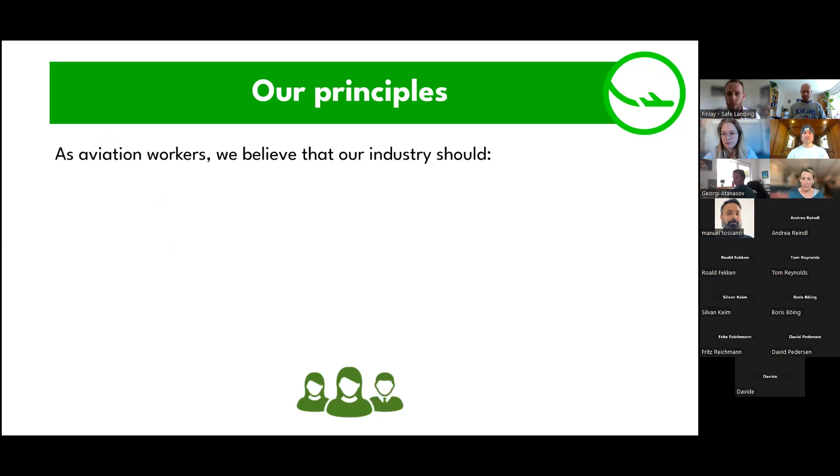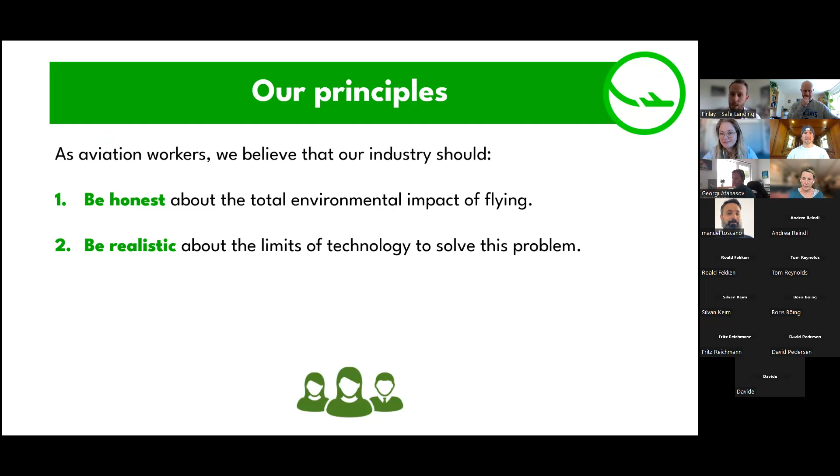We've got a couple of positions, principles as a group. We want our industry to be honest about the total environmental impact of flying. We want it to be realistic about the limits of technology to solve the problem. We want it to be transparent about future regulations required to reduce emissions. And we want to have a plan that accounts for all of that and supports workers as we transition and transform the industry towards a low environmental impact future.

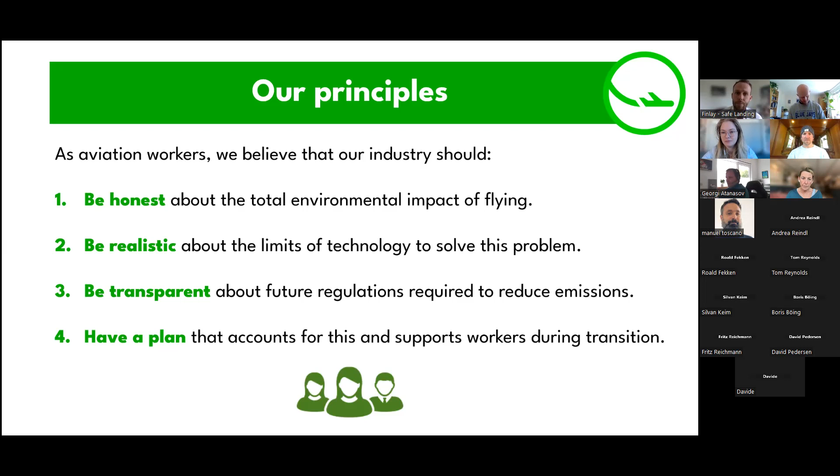Now, really excited about the presentation today. We've got Georgi Atanasov here. He's from the German Aerospace Centre, or DLR, based in Hamburg in Germany.

Now, this is a topic, flying slower, that I've been quite passionate about for a long time. We understand we've got a carbon budget, and also in terms of how much fossil fuel we can keep on burning. And we've also got limited resources when it comes to non-fossil fuel. So it's really important we fly as efficiently as possible so we can maximize how much we can fly within that budget.

And also flying slower is a potential way of doing that, as he'll take you through. But also the interesting thing from a Safe Landing perspective is maybe this will also allow us to increase jobs, even potentially within the constraints of flying less overall. We might be able to have a rebound in employment because we're decelerating how we travel. So really interested to hear some more of the technical input behind that. So Georgi, thanks for being here, and I'll hand over to you to take people through it.

Okay, thanks Finlay. So hello everyone. As Finlay mentioned, my name is Georgi Atanasov. I'm working for the German Aerospace Centre, in short DLR, at the Institute for System Architectures in Aeronautics. I'm a senior in the overall aircraft design team.

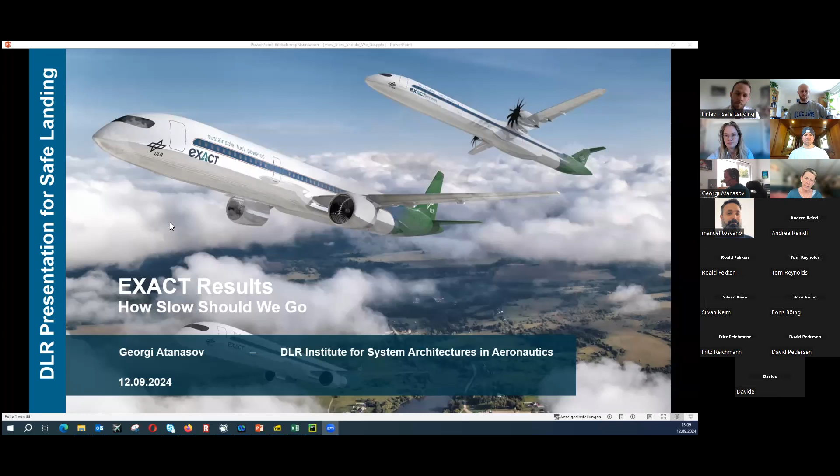So today the topic is how slow should we go, and on this topic there isn't very much literature or knowledge gathered, and this was something that we needed to improve in the past years. There was this huge project, a DLR internal project, Exact. So not everybody knows it, but there we did gain a lot of understanding on the topic, and the knowledge we got is quite interesting. So I'll try to share it with you.

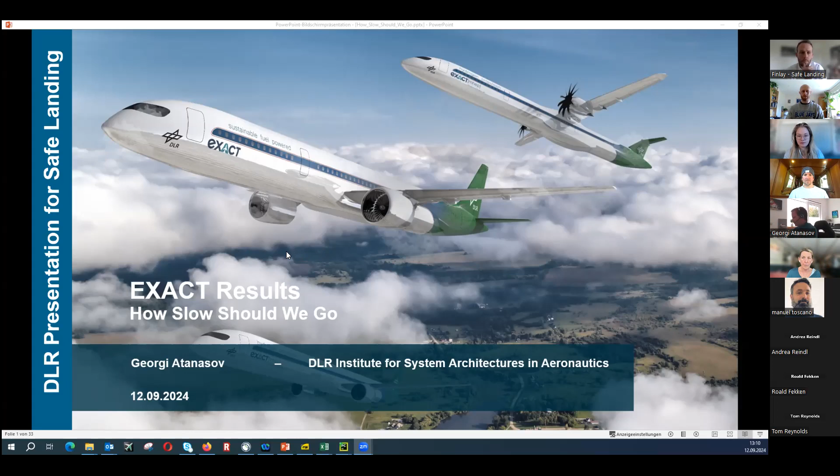So for this presentation today, first I start with the basics: why is flight speed important, then how is it important. Then I'll be introducing the DLR project Exact, followed by the description of a turboprop design within this Exact project, and a global fleet assessment study, followed by a summary.

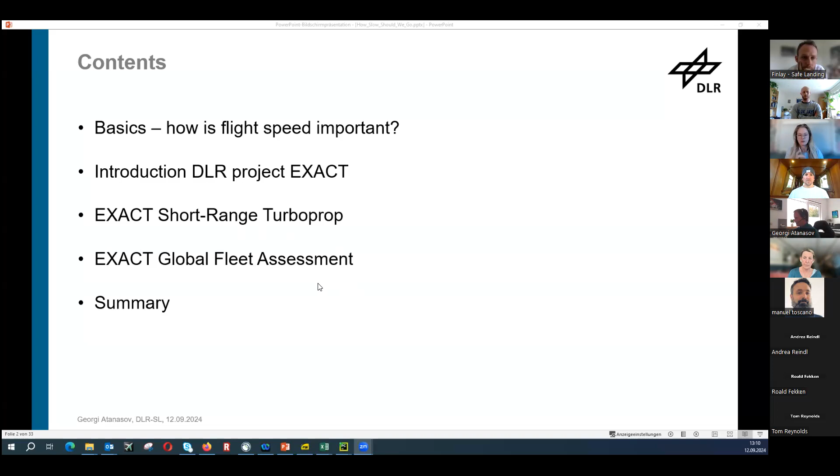So about the basics. If we look into simple forward flight, level flight of an aircraft, then we have lift equals weight, and we have thrust equals drag. It's a really simple case, and the aircraft needs to move from A to B. So the first question is, what is the energy needed to transfer from A to B?

The energy is power times time, so proportional to thrust times velocity times time, but it can also be rewritten as thrust times distance. So these are the same two equations: work equals force times distance.

So the conclusion is, because the drag can basically be described as the mass, or the weight, of the aircraft divided by the L over D, where L over D is the aerodynamic efficiency of the aircraft.

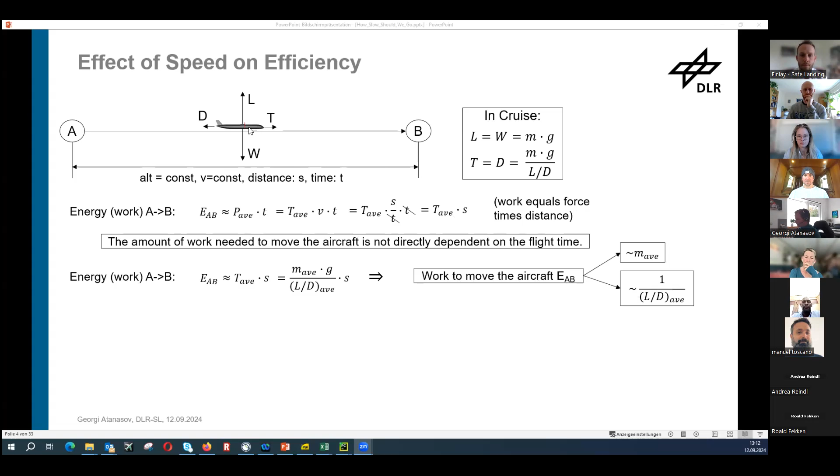Basically, the energy to move an aircraft from A to B is the distance multiplied by the mass of the aircraft divided by the aerodynamic efficiency, proportional to this energy. So if the distance is fixed, the only two parameters left are the mass of the aircraft and the aerodynamic efficiency. If two aircraft have the same mass and the same aerodynamic efficiency, you need the same energy to move both from A to B.

What comes additionally is the propulsion chain. This energy comes from the propeller or the fan of the aircraft, and basically the shaft energy is then the propulsion energy divided by the propulsor efficiency.

We can go further down the chain after the gas turbine. The gas turbine is the usual provider of this power, so the fuel energy is the shaft energy divided by the gas turbine efficiency.

So the fuel energy is basically proportional to the mass of the aircraft, the aerodynamic efficiency, and the propulsion efficiency — the gas turbine efficiency and the propulsor efficiency. This is the first order effect for moving an aircraft from A to B. Flight speed is not directly in these parameters, but it can affect the design such that these parameters change a bit.

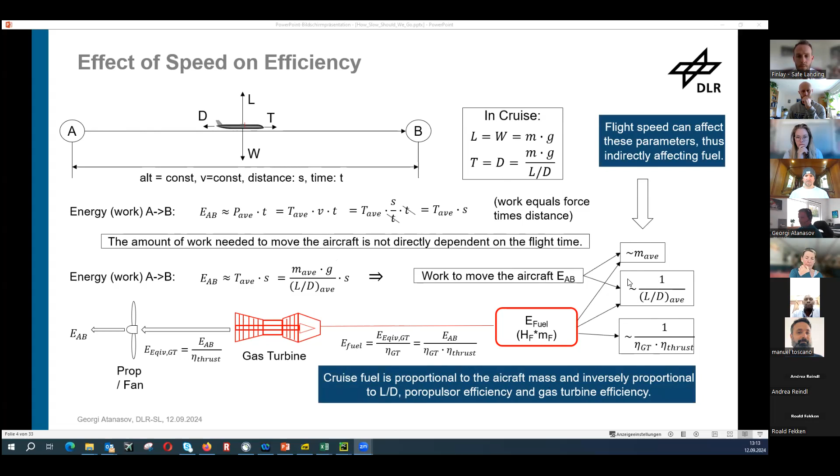So usually when we see an airliner, it has a look similar to this one: a transonic airliner with Mach speeds of over 0.76 typically. All of them at these transonic speeds have swept back wings and usually turbofan engines.

Turboprop propellers are not the typical design choice, or not a suitable one, because propellers do not operate really efficiently at speeds close to the sound barrier. Counter-rotating propellers or open fans can be significantly more efficient than turbofans, but they come at the cost of high engine noise levels, so they also usually don't make it to final products.

So what happens if we switch to subsonic speed? First of all, turboprop engines become a suitable design choice. Propellers designed for subsonic speeds can be really efficient, and they're also much larger than fans, so they can move much more air and require much less power for takeoff.

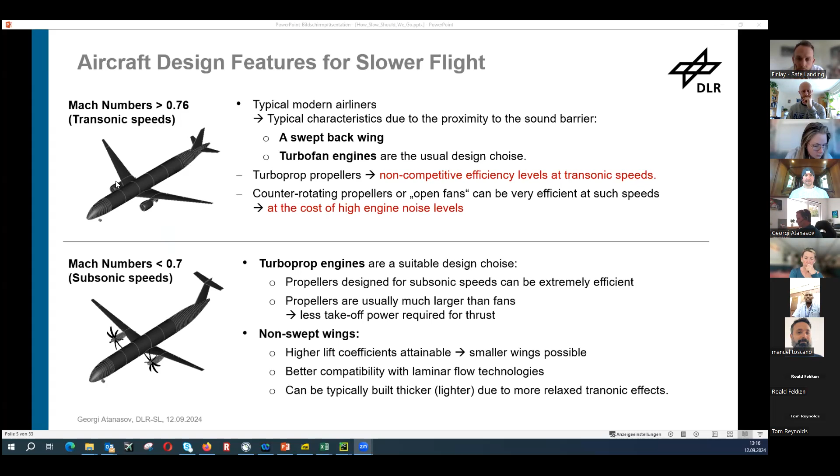They can also be built structurally thicker, so lighter than a typical swept-back wing for transonic operation. So overall, shifting from transonic cruise speeds to subsonic cruise speeds can enable more efficient propulsion, lighter structures, and improved aerodynamics. Overall improved flight efficiency usually enhances any additional sustainability solutions — efficiency is always the base for sustainability.

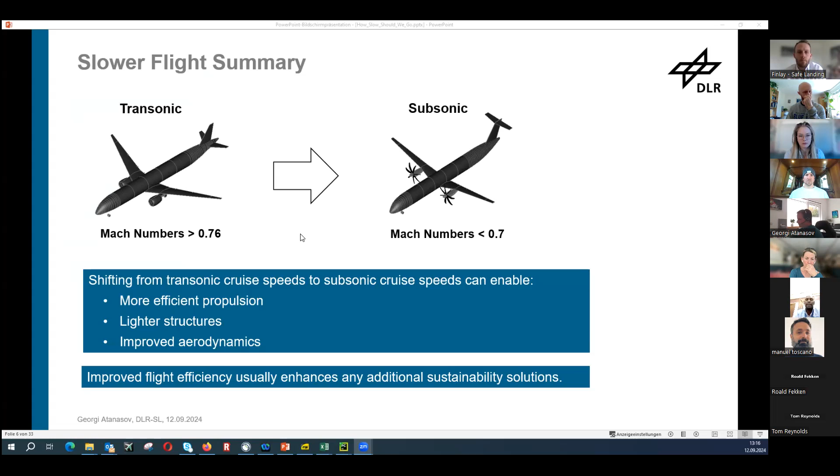So a couple of words about the DLR project EXACT that I mentioned: it started in 2020, four years ago, and finished last year.

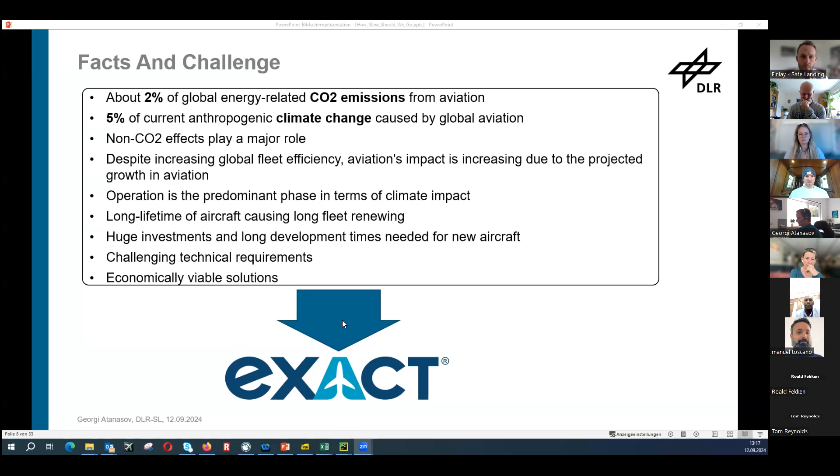Back then, there were a lot of open questions about sustainability and research topics starting to arise at an increasing rate. So there was a lot of need for improving the understanding of how aviation sustainability can be improved and what strategies should be taken politically. Because of this, we had to try to answer a lot of these questions, and this gave way for a large project which basically tries to answer those. Answering such questions cannot be done in a small project, or not satisfactorily at least.

So you need a lot of disciplines to assess. One has to try to capture the whole picture, from energy production to air traffic demand and air networks to aircraft design, which basically builds the bridge to the climate impact. So from energy production and propulsion technologies to air traffic to aircraft design and then to climate impact. Everything needed to be looped in this project, and it got a lot of funding volume, basically 20 million euros for these 4 years, with a consortium of 20 DLR institutes. So it bundled quite a significant portion of the DLR capabilities, and it was a really interesting project to be part of.

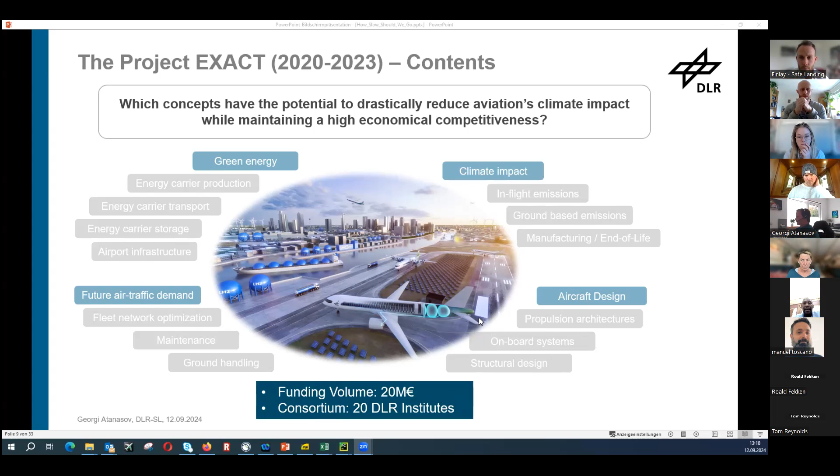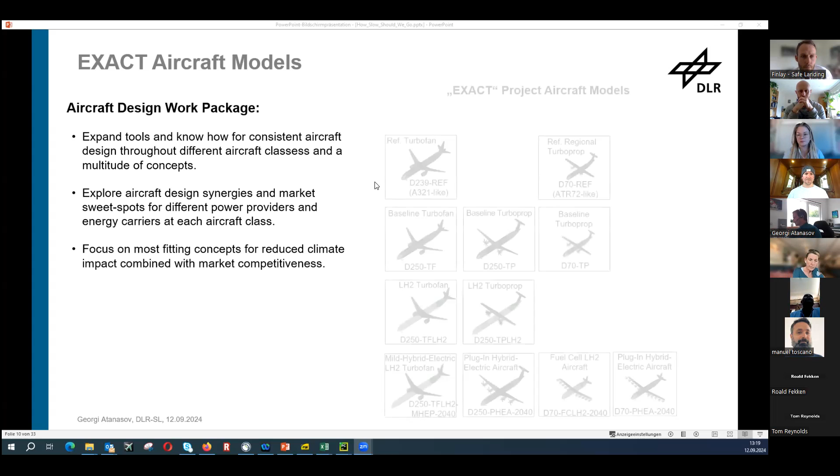On the aircraft model side, as mentioned, the aircraft models needed to build a bridge between the global assessment and the technological assessment. We had to expand a lot of knowledge and know-how and create new tools to enable consistent aircraft design for different aircraft propulsion technologies and energy carriers, and also for different aircraft classes. It was a difficult challenge because usually you have a project where you have one aircraft and it needs to be calculated and assessed versus a conventional aircraft. This is a typical project. In this case, we had to answer a lot of questions, so we needed a lot of different aircraft calculated, and they needed to be calculated in a consistent manner, comparable to each other. So basically, they had to be compared consistently with each other. And this was a significant challenge.

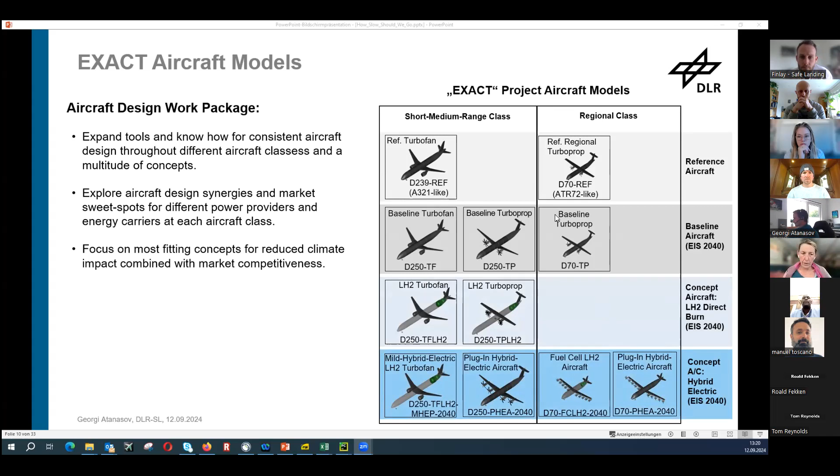But we also set some boundaries. The focus was only on the short, medium range class and the regional class. We had the reference aircraft there, so this is the starting point, like the typical airliners for these two classes. The baseline aircraft are assumed to be kerosene fueled, and the advancements are designed for the year entry to service of 2040. Only evolutionary advancements of propulsion and airframe are assumed for them. Then there are the direct burn concepts with hydrogen and hybrid electric propulsion concepts, clusters basically. But the focus of the presentation is on these conventional aircraft.

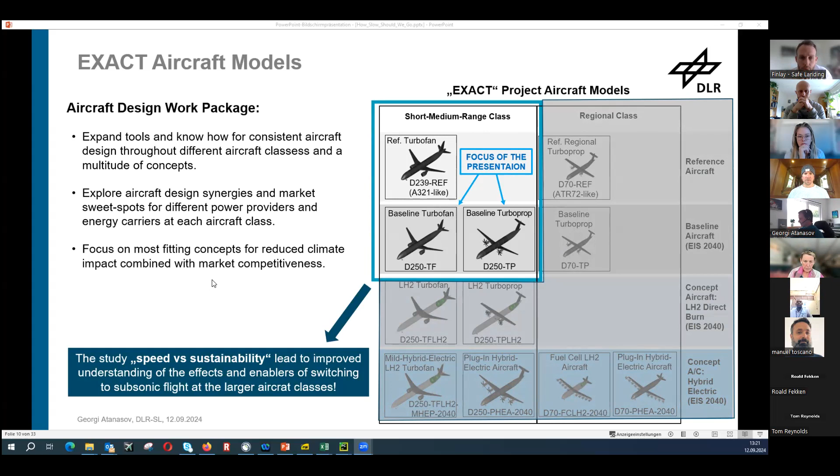So the study speed versus sustainability led to quite improved understanding of the effects and the enablers of switching to subsonic flight at the larger aircraft classes. And this is what I'm going to be focusing on in this presentation in the further slides.

So we have the boundary conditions for this study. The starting point is an A321 neo-like aircraft, so it's an interpretation by DLR of this aircraft. It's a model that we created to basically try to imitate the aircraft. And it has these typical TLARs, top-level aircraft requirements. So the typical design range of the aircraft with the maximum payload and takeoff field length requirement for the aircraft. These are used as a base for our designs with some changes.

So the TLARs are changed now to a bit shorter. The A321, usually calculated with a design range of, or the base version at least, with 2,500 nautical miles. The range is shifted to lower range capabilities because we're trying to assess the shorter spectrum of the market in EXACT, and the focus was on sustainability. So reduced range helps a bit with this, and this is the range assumed for all the aircraft in this class in EXACT. Then we have slightly reduced takeoff field length because of the shorter range, so a denser network needs to be serviced.

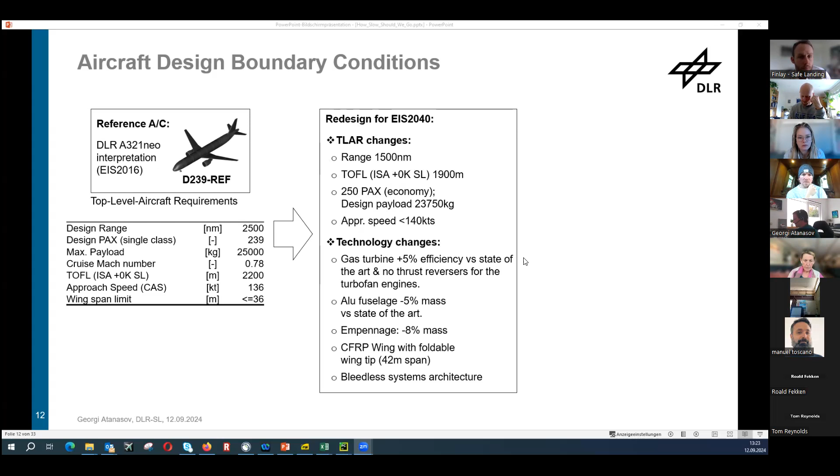Also a bit larger passenger capacity, also to improve sustainability. And there are some technology changes like improved gas turbines, better materials for the airframe, CFRP wing with foldable wingtips, and a bleedless systems architecture. Using these requirements derived for EXACT, two aircraft are created and compared to each other. We have a typical turbofan with these technology improvements, and then we have a turboprop, and this turbofan has basically the same characteristics as this A321 with these new requirements, of course. And a turboprop, but for the turboprop we have the Mach number open, so there is no comparable product to start from, so we needed to start from scratch, and cruise Mach number needed to be optimized.

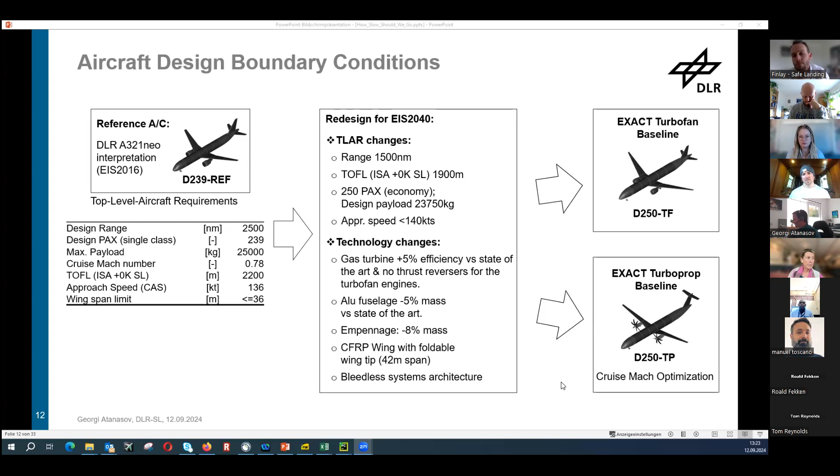So about the turbofan, this is the ladder chart showing the design mission fuel of this aircraft as compared to a state-of-the-art airliner. We have some improvement due to reduced mass, improved aerodynamic efficiency, also improved propulsion efficiency, or better gas turbines, and higher bypass ratio, which is a result of the better gas turbines.

There is this intermediate step with a winglet model, or improved future airliner with winglets. But then we also included the foldable wingtip solution, so basically even higher span to improve the aerodynamics even further. And overall, with just conventional technologies, they allow improving the fuel efficiency by about 20%.

Truss-braced wing and laminar flow technologies are not included in the study, so these were off. This is not in the spectrum of the study, but they could allow even better performance in the end. And this is the turbofan that the turboprop then will be compared to, so this 20% better turbofan than the conventional reference one.

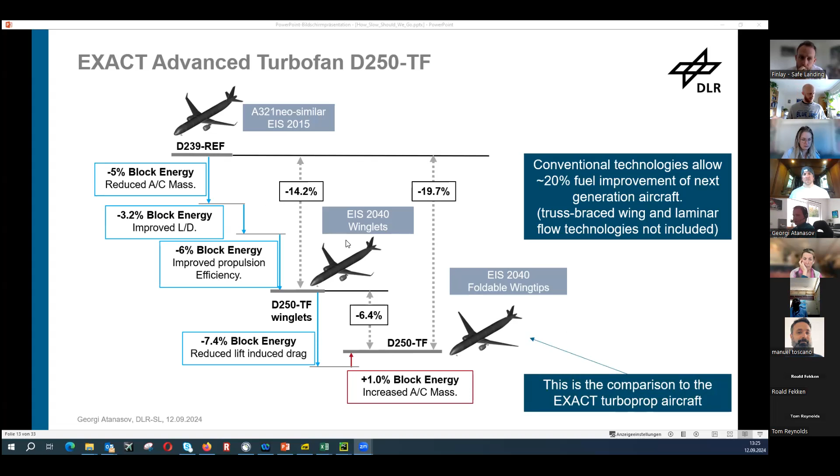So this is the turboprop design. We have the basic intention to trade speed versus efficiency. The design KPI is the global fleet operating cost of the aircraft, so it's not just on block fuel or the optimization, but on the global fleet operation costs.

Only unswept wing design was considered to avoid even further complications and complexity in the modeling. So this was one boundary condition that we set for the study. This required also Mach numbers below Mach 0.7, or Mach 0.7 and below.

The low wing configuration could be kept, so it's the same wing below the fuselage as in the A320, for example. It's possible with slightly gulled wing, despite the large propellers.

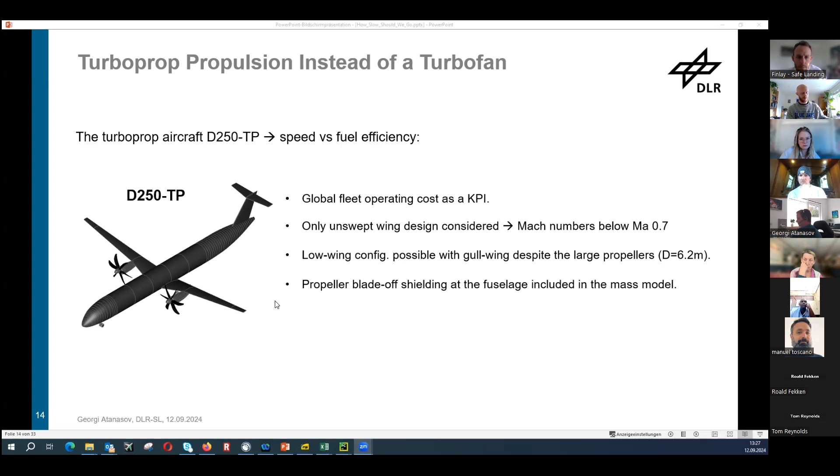Propeller blade off shielding is also included in the fuselage structural model, so the passengers are protected if basically a blade comes off during operation. T-tail was implemented to avoid the empennage being in the wake of the propellers in the slipstream.

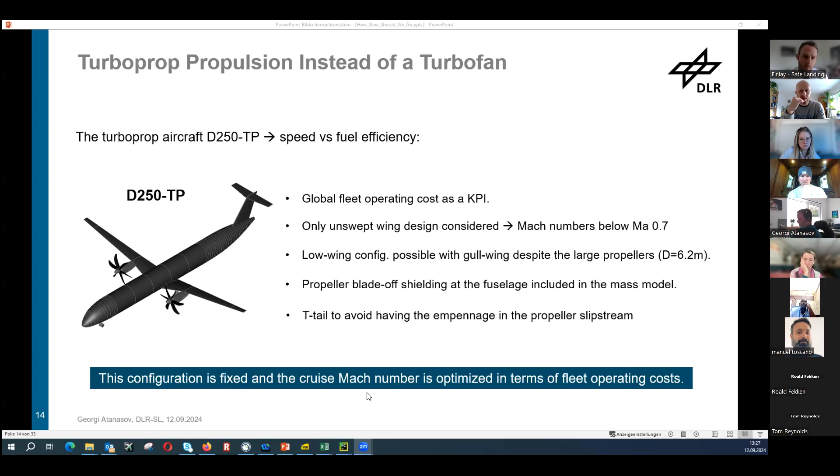And this configuration was fixed, and the cruise Mach number was optimized in terms of fleet operating costs, or at least traded, not really optimized, as I will show.

A couple of different configurational features. So we have slightly shorter fuselage because of the different empennage. The APU can be shifted a bit back below the vertical tail, so we get a little bit shorter fuselage.

Then, due to the gull, as mentioned, we can have a propeller which is aligned with the leading edge. So the middle axis of the propeller is aligned with the leading edge of the wing. And so when the center axis is shifted upwards, there is enough space below the wing, because if you have just a turbofan, you cannot align it with the wing, it has to be below the wing. So it's a comparable integration space-wise, or at least vertically.

And the landing gear could be designed a little bit smaller due to the gull. So without a gull, I would have a similar landing gear length, but then the landing gear would be inside the slipstream of the propeller, because it still needs to be retracted. So if it's too long, it needs to move outward, and if it's inside the slipstream, then it will be really noisy in takeoff. So these kind of aspects were considered in the design.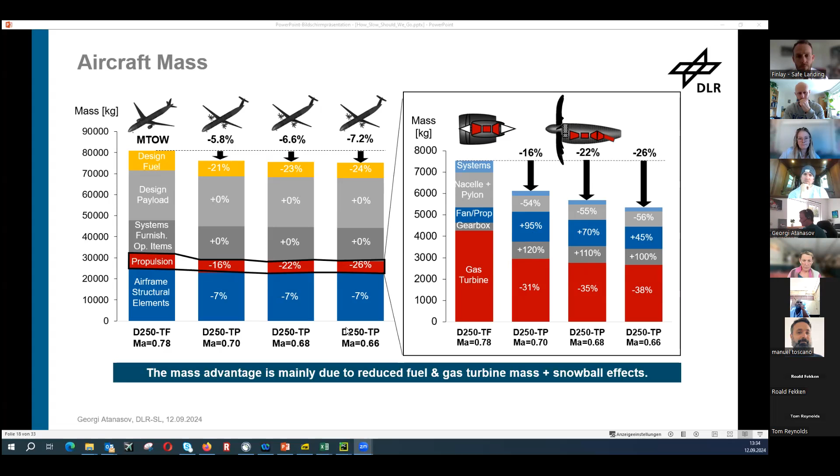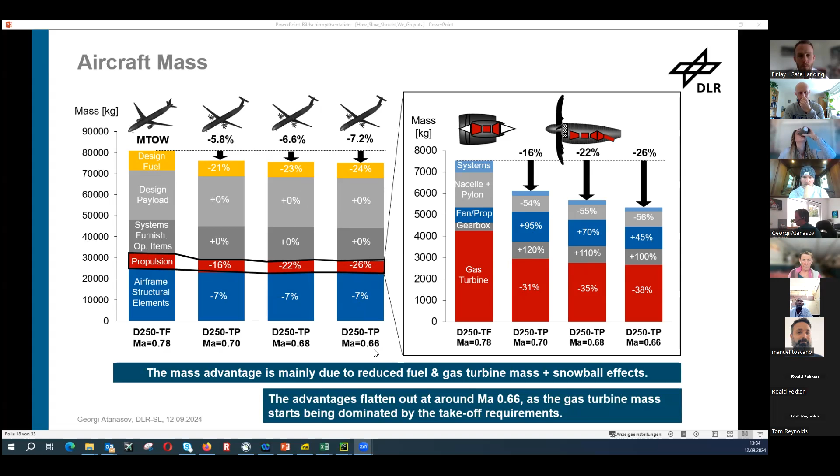And yeah, the gas turbines are smaller because the aircraft is getting slower, so flying slower means less power for cruise. The aircraft also requires much less power for takeoff, as I already mentioned, and I'll show in the next slide why. But these advantages are flattening out also. So below Mach 0.66, you don't get significantly more advantage in terms of mass.

First of all, on the turbofan versus turboprop efficiency increase, just an explanation example. The main difference between the two is the large propeller diameter, and why it can be built large is mainly because the turbofan requires a high fan pressure ratio.

High fan pressure ratio means the pressure jumps behind the fan. One thing it does to compensate is because the duct is there, and the duct creates pressure losses of around 1.5%, so the pressure drops till the end of the fan by 1.5%. So you need a high fan pressure ratio just to overcompensate this pressure drop, and then it doesn't need to be significant.

It needs to be insignificant compared to the fan pressure ratio, because if you have a fan pressure of 5%, for example, 1.05, and a drop of 1.5%, then you squander a lot of energy basically. So it needs to be negligible compared to the fan pressure ratio. That's why 1.35 is actually quite low, and it's enabled by a low pressure drop in the nacelle.

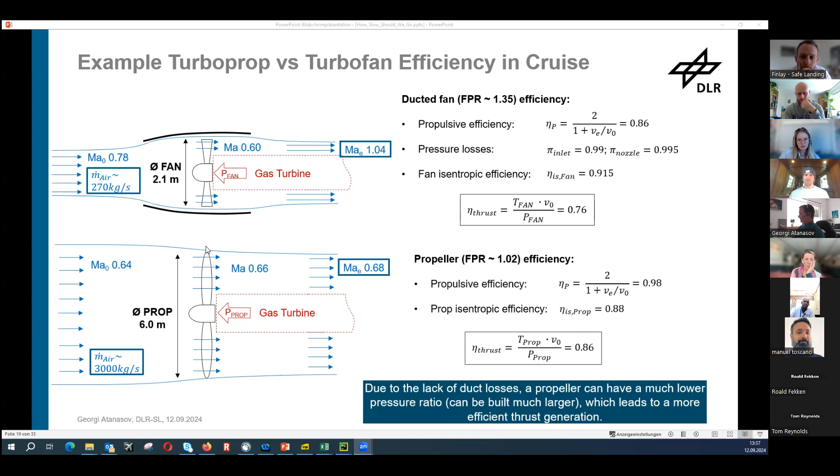So this leads to a propulsive efficiency drop. The propeller just has a 2% efficiency drop due to the slow acceleration, and the turbofan, because it accelerates the air quite a lot, has a propulsive efficiency drop of already 14% before the other losses. So overall efficiency of the turbofan is about 76%, and the turboprop in this case is about 86%. This is mainly because there is no duct, so this is the enabler.

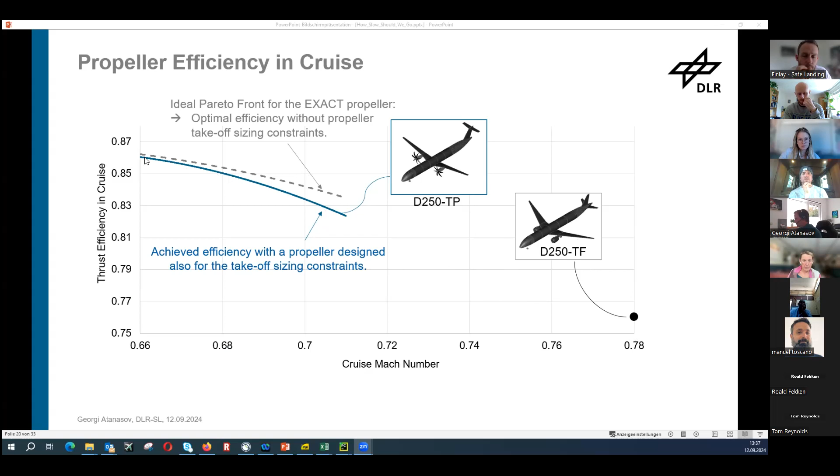There's a plot of propeller efficiency with variation of design Mach number. It drops significantly the larger the Mach number, and this is the efficiency in comparison to the efficiency of the turbofan. So at some point you don't want a turboprop anymore, but in this area it's quite good.

It's basically this helicopter effect. A large rotor needs to accelerate the air, not by a huge amount, just a little to get the thrust, and it requires much less power. So the more you need to accelerate the air, the more power you need. And it transfers even to end of field conditions, growing in proportion in this case.

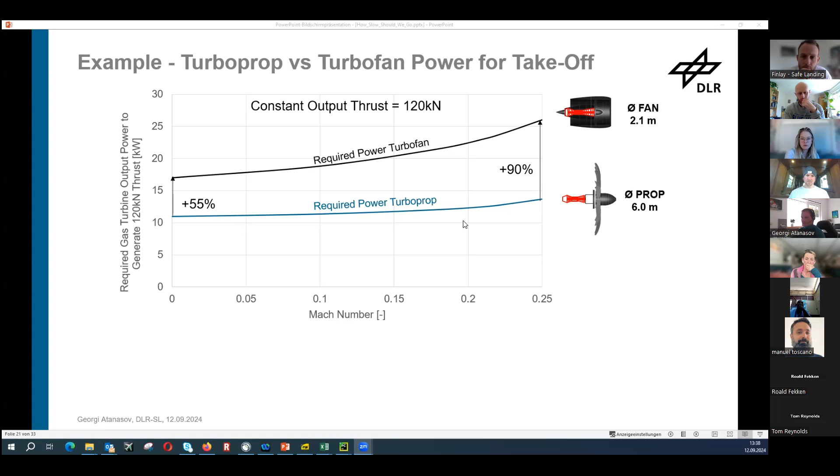So a turbofan needs to be much larger, basically, to generate the thrust needed for takeoff than a turboprop. The implication is basically a turboprop aircraft needs much smaller gas turbines.

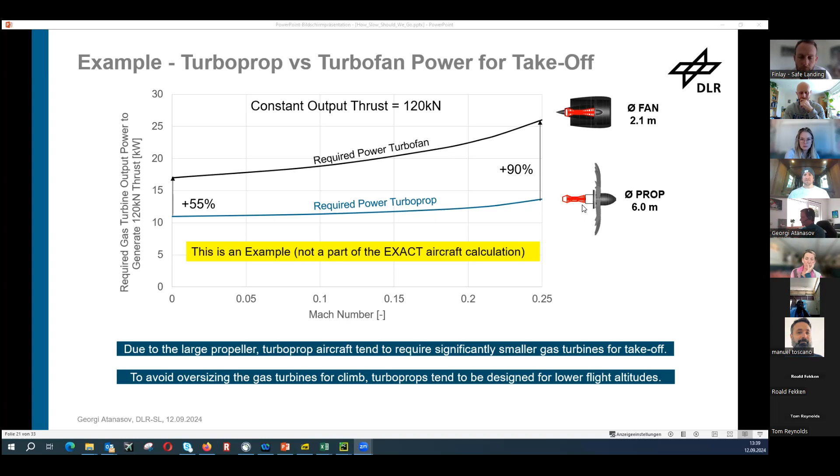To avoid oversizing the gas turbines for climb - if you set too challenging conditions for climb, for example set the aircraft to climb to really high altitudes, then this starts to be the driving point for your gas turbine design - to avoid this, typically turboprop aircraft get lower design altitudes. So it matches the takeoff power requirement, basically. This is why the better match for turboprops is lower altitude flight.

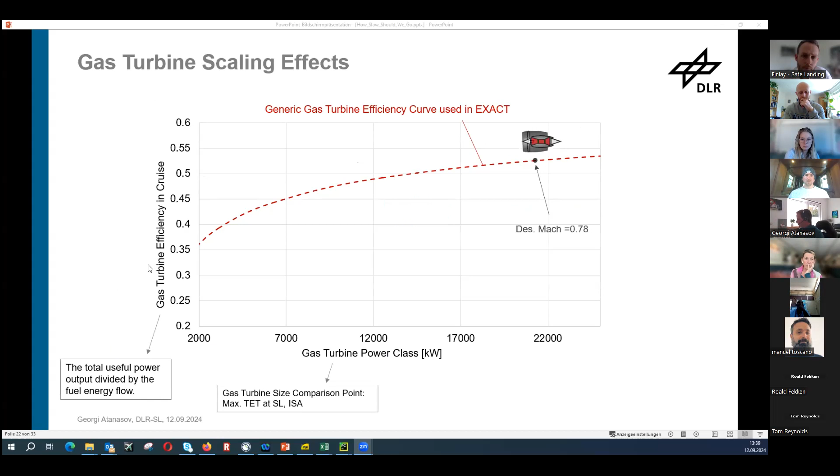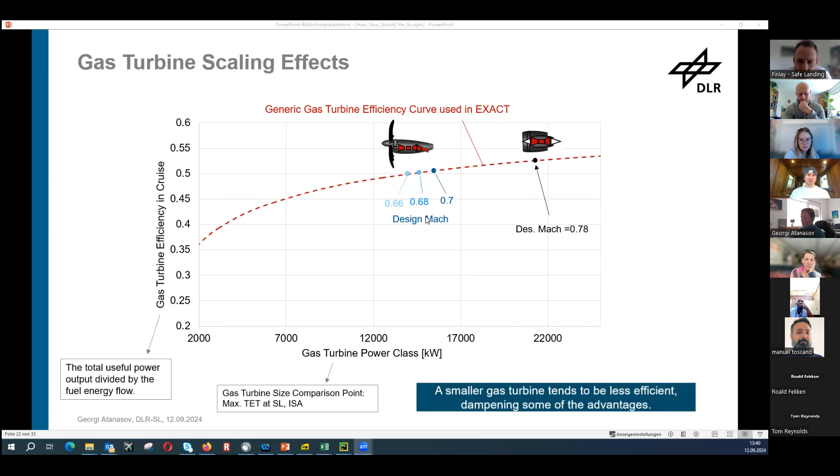So smaller gas turbines is not always good in all aspects. They are lighter and cheaper, but also less efficient. This is a generic gas turbine efficiency curve used in EXACT. We have the power class here, which is basically the power of the gas turbine at sea level conditions at maximum temperature, just for comparison of the classes, a comparable point, and the efficiency of the gas turbine in cruise. The turboprop gas turbines are much smaller, but also less efficient, so this dampens the advantages a bit.

So what happens is we have the following combination of effects that I explained before: mass, aerodynamics, then the efficiency penalty of the gas turbine, large gearbox - a two-stage gearbox needed for the large propellers, also a penalty - and then we have block fuel improvement due to propulsive efficiency of the propellers versus ducted fans, and improvement of the allowances and descent, so of design operation. Overall, for 1,500 nautical miles, the turboprop is like 20% better in terms of block fuel. This is a Mach 0.66 version.

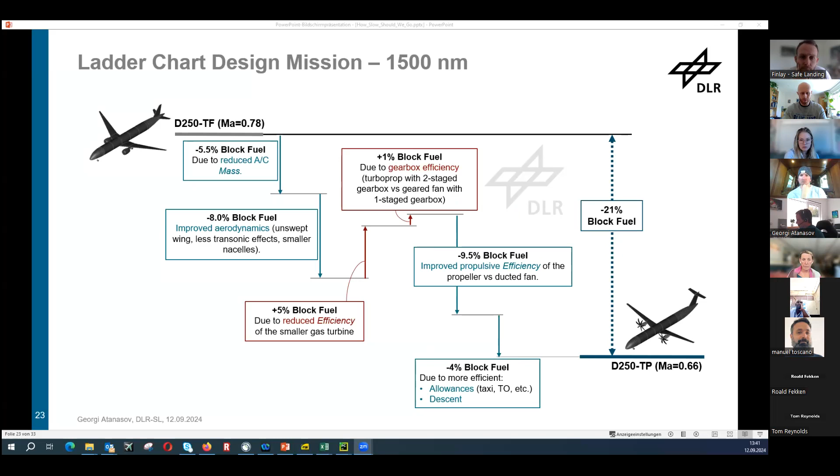One additional aspect, very important one as it turns out: the allowances or landing takeoff cycle. Basically you have takeoff fuel, taxi fuel, approach and landing fuel. They're much less with smaller gas turbines. So when you need a lot less power for takeoff, you also use a lot less fuel for takeoff, and the same goes for taxi and approach and landing. If your gas turbines are much smaller, they burn much less fuel during idle conditions. So overall, a lot of fuel can be saved in these phases.

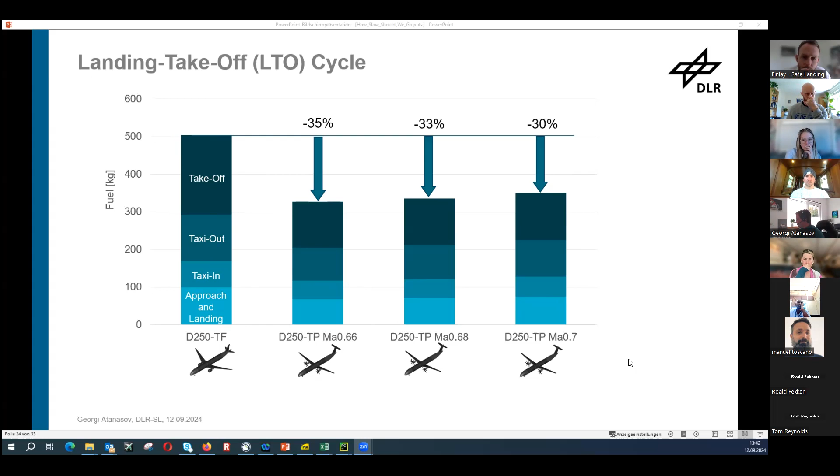You see the fuel for the turbofan is about 500 kilograms just at the airport, and it gets to about 350 kilograms for a turboprop, which is quite significant for lower range.

So if you look at the distances flown, this is the block fuel line for the turboprop and the block fuel line for the turbofan. You see 2 tons of fuel for a 300 nautical mile mission - basically Hamburg to Munich, no, a bit less, but about this range. A quarter is for landing takeoff cycle, so quite a lot is just burnt at the airport.

And because of this, the relative savings - these are the lines for relative savings - you see the relative saving at 1,500 nautical miles is about 20% for a turboprop with Mach 0.66, but it improves to about 30% at the shorter missions.

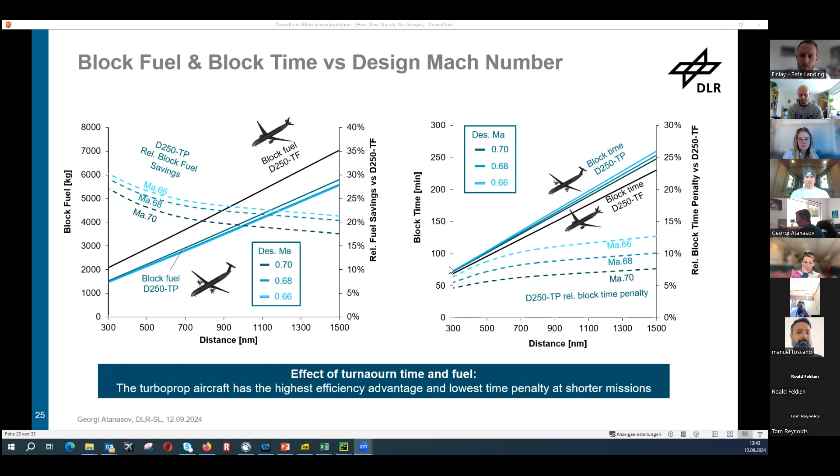So this is quite a significant aspect of turboprop operation, and a similar effect can be traced for block time. Mission time penalty for Mach 0.66 turboprop is about 12%, but just 5 to 10% for shorter missions, because a lot of the mission is around the airport and doesn't affect cruise speed. So the biggest advantage comes at lower distances for such a turboprop, operating intracontinentally it can be really beneficial without many penalties.

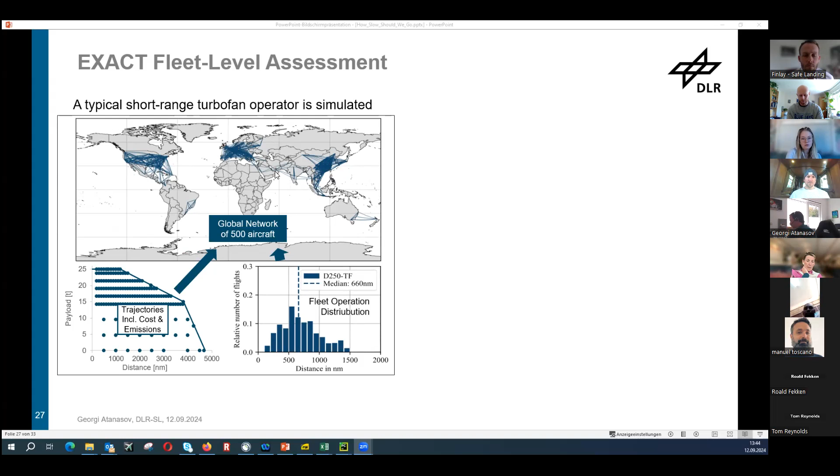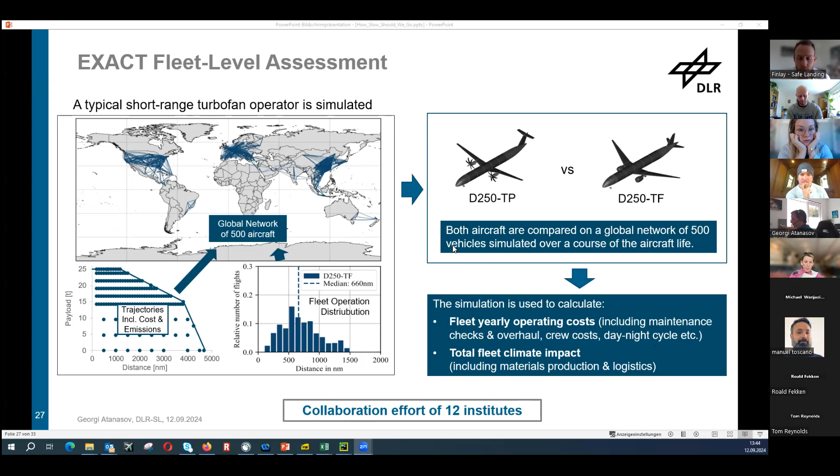So global fleet level assessment: in EXACT, it was calculated. Basically, it simulated a global operator with 500 machines on many different routes throughout the whole cycle of the aircraft. The simulation included its whole course of life, and it was used to calculate the fleet yearly operating costs and the total fleet climate impact. It included material production, logistics, maintenance checks, overhaul, crew costs, day-night cycle effects, and so on. It was a collaboration effort including the aircraft design disciplines of 12 institutes, so quite an extensive assessment.

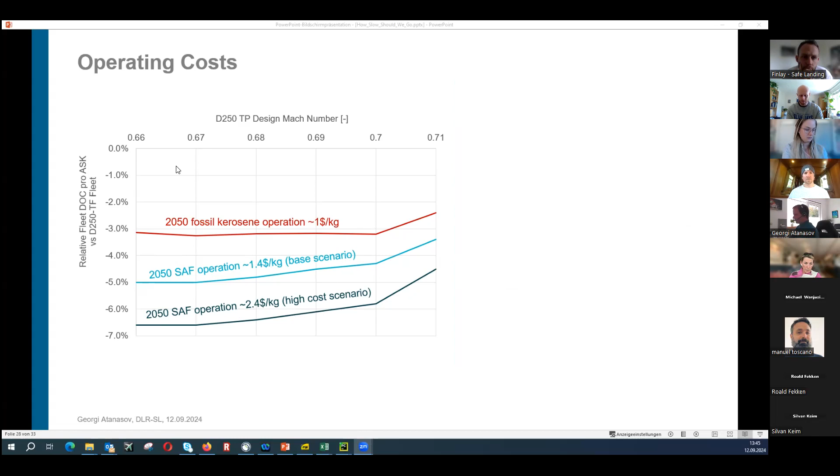About the fleet operating cost per ASK, per available seat kilometer, we have 3 different lines: fossil fuel in 2050, SAF in 2050 with 2 scenarios - base cost scenario and high cost scenario for SAF. At this point you can see the optimum tends toward these two Mach numbers, as does fuel efficiency. Here's a breakdown - you can look at it after the presentation for more details. What makes a positive impression is that the effect is relatively flat, so you can have this design or that design and it won't be much different in terms of cost. It's also better in terms of operating cost than turbofan, at least for the boundary conditions considered in EXACT.

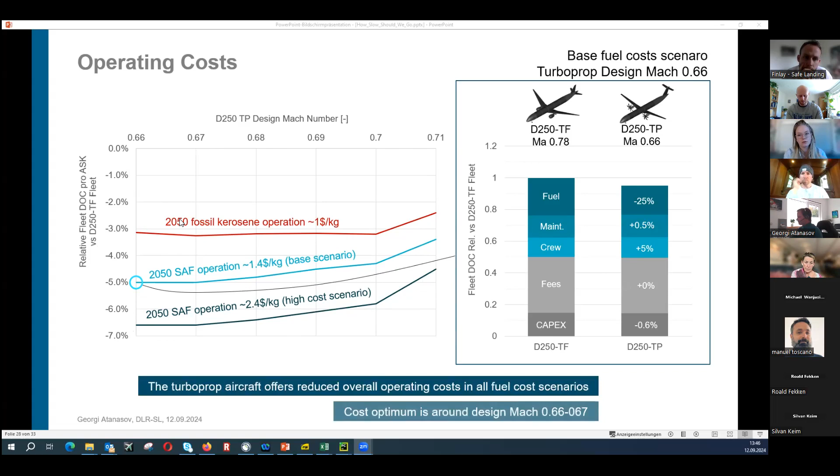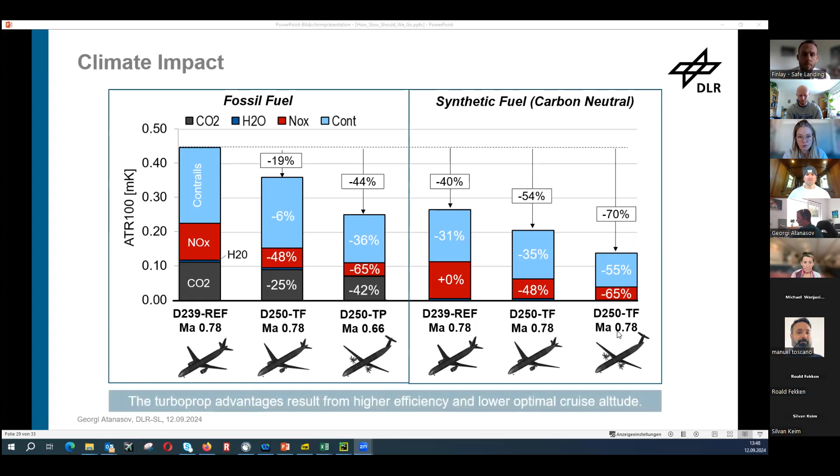Flying a bit slower at Mach 0.66 enables a quite significant boost in sustainability potential. The highlight is you can have a lot of improved efficiency due to the shift to subsonic flight and shift to turboprop propulsion, and the price you pay is just 15% speed reduction. It's not like you need to go 2 times slower - you're going 15% slower, and you gain much more improvement potential than this penalty. This is the basic highlight.

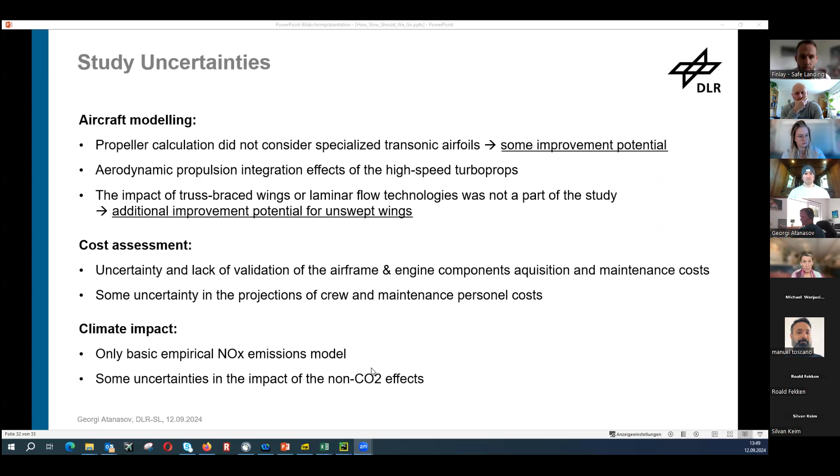And yes, there are uncertainties - Exact was more a top level assessment, because we had to incorporate a lot of effects, characteristics, parameters, and quite a lot of modeling. So some of those were top level, including costs and climate impact, with only a basic empirical NOx emissions model for the gas turbine, for example, and some uncertainties in the impact of non-CO2 effects. But the whole picture is consistent within itself, so it's a good indication that this should be looked into further, and we're doing that in Exact 2.